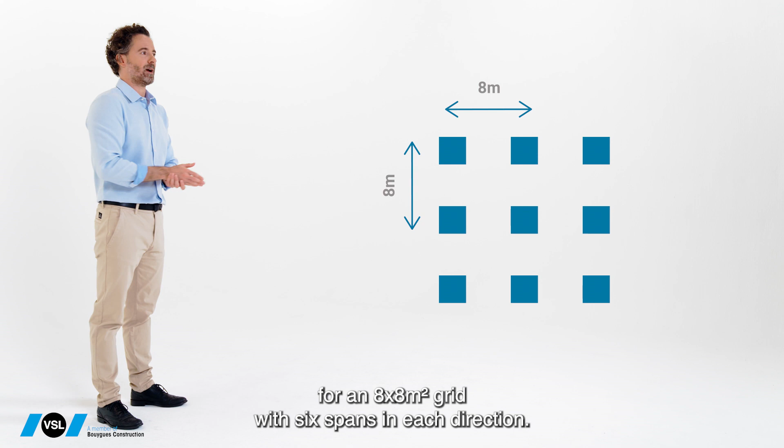Now, let's have a look at the global warming potential of the different components of each solution and their overall consolidation. For this study, we've got 5 slab configurations, all with typical loads for offices. On the one hand, we have analyzed 2-way configurations for an 8x8 square meter grid with 6 spans in each direction. Both a solid flat reinforced and a solid flat post-tension slab have been considered.

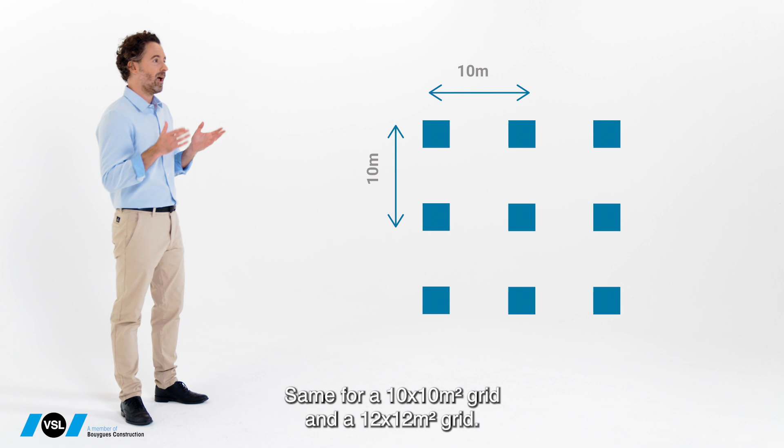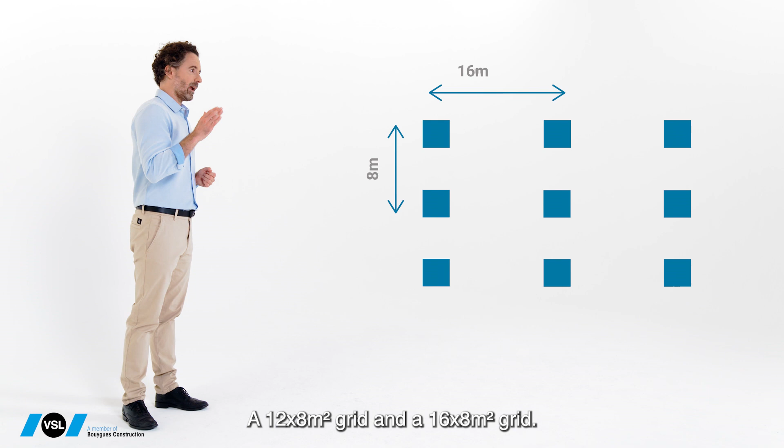Same for a 10x10 square meter grid and for a 12x12 square meter grid. For this third case, we've also analyzed an internally voided slab solution. On the other hand, we've analyzed 1-way configurations where the main span in one direction is larger than the span in the second direction. A 12x8 square meter grid and a 16x8 square meter grid. Yet, for this last type of grid, we consider that to be outside the range of reinforced concrete solutions.

At this point, it might be relevant to share a few details about how we compared. To be fully objective and to simplify this comparison, PT components other than strands have not been considered. This means ducts, anchorages, and grout. This could multiply the PT part by around 1.3. In real life, things can vary according to projects or countries. But once again, for the sake of objectivity, let's consider that we use the same concrete for all options.

The quantity of materials, PT and rebar, mainly depends on the local standards and codes. For this study, we've used the Eurocode, which so far doesn't allow for green concrete for PT slabs. According to the Eurocode, it is common to use concrete with a high percentage of clinker, cement type CEM1, that has a higher carbon footprint. For reinforced slabs, we can use green concrete, which can be less carbon emitting. Here, for the comparison exercise, all concretes are type CEM1.

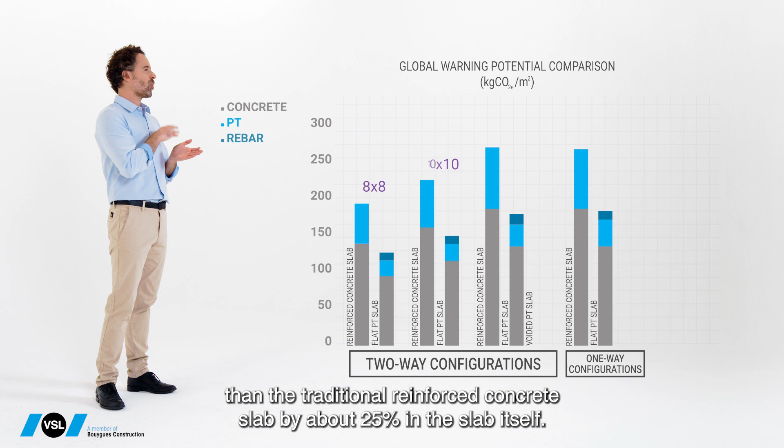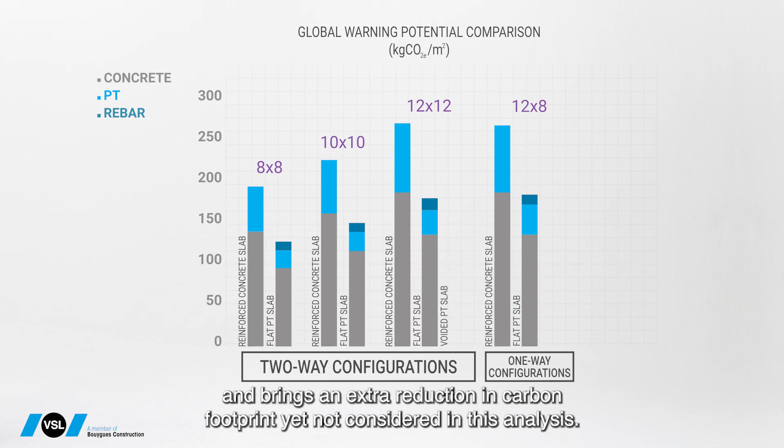So what can we notice? First observation. The post-tension concrete slab option is less carbon emitting than the traditional reinforced concrete slab by about 25% in the slab itself. This self-weight reduction allows for an optimization of foundations, columns, and walls, and brings an extra reduction in carbon footprint, yet not considered in this analysis. It might be done with other codes than the Eurocode, but in any case, there's always a gain. In a nutshell, PT slab is definitely a sustainable solution compared to traditional reinforced slab.

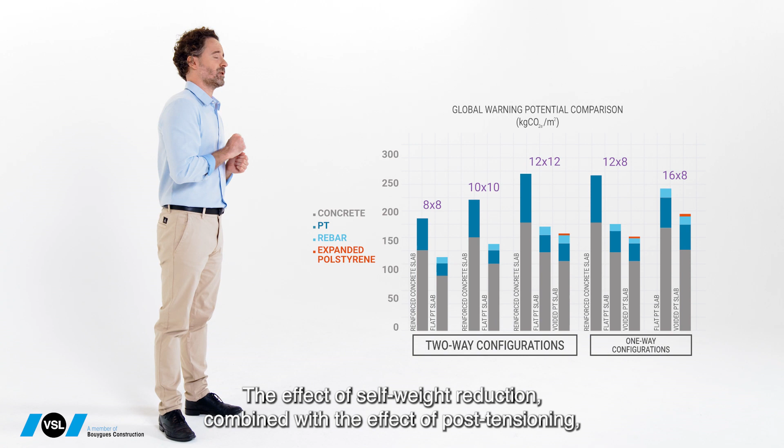Second observation. PT voided slabs, that can also be PT waffle slabs or ribbed slabs, allow for additional savings in carbon footprint. The effect of self-weight reduction combined with the effect of post-tensioning provide very efficient solutions in terms of low CO2 emissions. In fact, the combination of voiding with post-tensioning is the most sustainable choice when we work with cast-in-situ slabs.

I've just realized I mentioned waffle and ribbed slabs alongside PT voided slabs. Maybe I should quickly explain the difference. With the waffle slab, the installation method is slightly different from the internally voided PT slab. Here, we place the voiding elements directly onto the falsework prior to assembling the steels and pouring the concrete.

The ribbed slabs, that exist in both reinforced concrete and PT concrete, are specifically used for one-way slabs. The voids in the slabs are placed to create a ribbed one-way solution. This solution has larger benefits in the reduction of consumption of materials and in the reduction of carbon footprint.

That's it. Of course, the choice of a slab solution depends on many criteria, but the carbon footprint is an important indicator to explore and consider in your decisions.